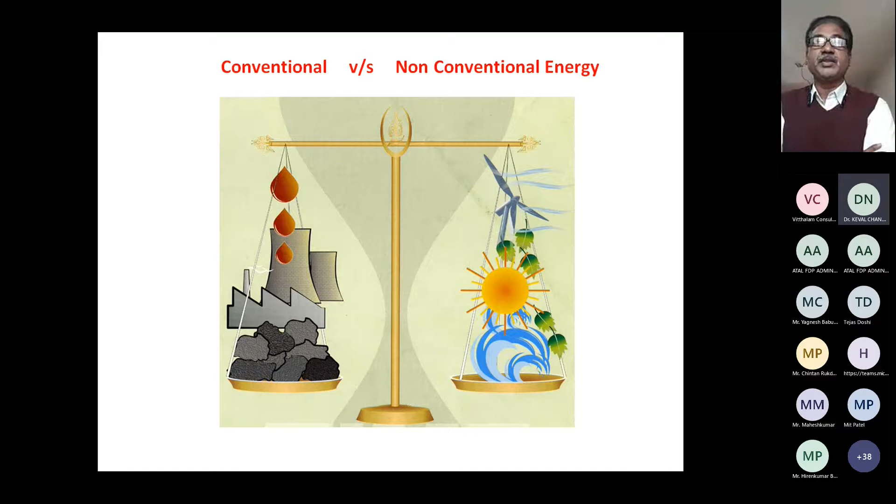So in this sense, we'll be having solar and wind as the renewable energy sources here, and that is the abundant source, the sun, and similarly the hydro, water cycle also there, and windmills. Because of fossil fuel depletion and pollution problems, as all of us know, we are gradually shifting to renewable energy sources, non-conventional energy sources. Solar is the major one, as all of us know, and it is replacing almost the installed capacity, as the government and private sector want to increase.

So people are preferring to go for solar PV. Similarly at the domestic level, all these are, we are all aware that now rooftop solar PV plants are going to reduce or mitigate our problem of electricity generation for the country.

As you know, at present we almost have 350,000 megawatts of installed capacity in India, but it is not sufficient as the GDP growth rate is at 7%. So we have to increase it very much, and one of the helping hands now we have got is solar PV.

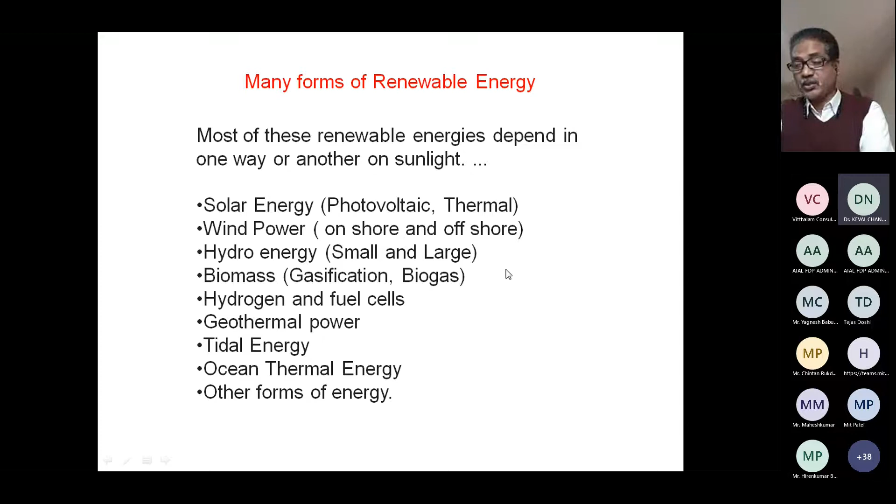So these are all small portions of these energies also getting tapped, but there is not much noticeable thing happening there, and solar and wind are in a big way. It is going on - onshore is there up to now, and offshore also people are exploring at present.

If you see the figures of India's installed capacity, it's mostly coal-based, almost 57 to 60%. At this point in time, that growth is slowly reducing and stabilizing because renewables are picking up a little, and the government has also given emphasis to this.

The installed capacity needs to increase from the current level of 344 gigawatts, that is 3,44,000 megawatts, to 562 gigawatts. It is required to go up as the country is growing, since consuming more energy per capita is an indication of becoming a developed country.

So per capita energy consumption in India means per person per year, how many units of electricity-equivalent energy they are consuming, whether it's petrol, diesel, electricity, or anything else, if you consider all the total energy. So what is the quantum of units you're consuming? That depends, and from that you can tell the country's growth rate.

Typically, per capita energy consumption in India will be like 1,500 to 2,000, whereas in the US and other developed countries these values will be like 15,000 to 20,000. One reason is that in cold countries electricity consumption is very high partly because of weather conditions, as they always run heaters in their homes. That may be there, but even with a lot of industrialization, electricity consumption is much higher. Also, the population is very small there compared to India, so when you calculate per capita, these values become bigger.

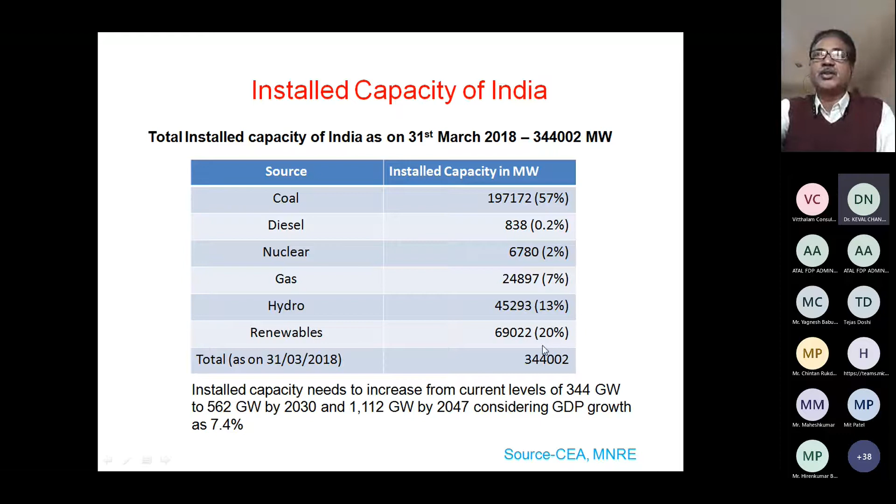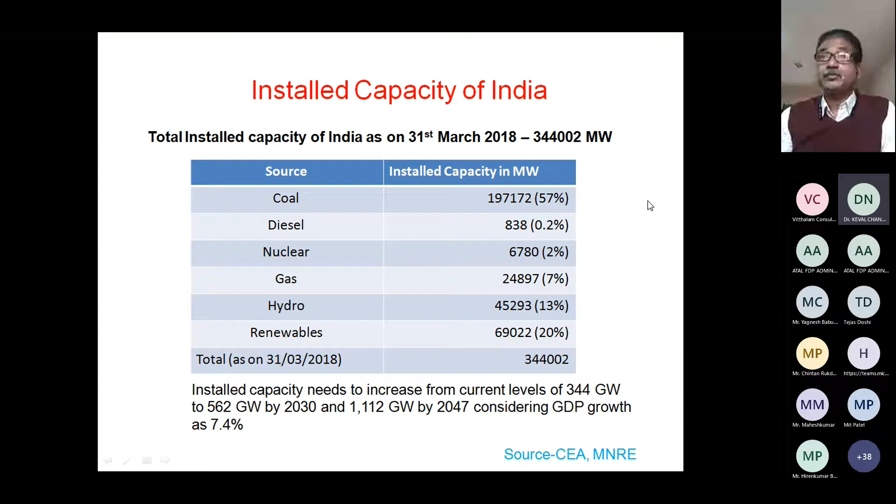The authority is quoting these things. That's why, to reach those values and targets posed by the electricity authority, the government has given a target.

This is another scenario, which is what I showed in the previous slide - renewable energy contributing about 20%. The bifurcation of that is given here: small hydro, wind, and solar. Out of these, wind and solar are the major portions. Earlier in this decade, wind was picking up the maximum potential being tapped, and now solar is picking up because earlier solar costing was more, but now that problem is solved, with a lot of Indian manufacturers available, and also cheaper panels available from China and other sources.

Because of this, more and more solar power plants are being installed. A lot of private parties are also coming up to set up 2,000 or 5,000 megawatt solar power plants, because of the government's Power Purchase Agreement (PPA) facility. Also, the solar power plant gestation period, like installation time, is very small compared to thermal power plants, and it works on a very reliable basis. The only thing is, we can only get this during daytime, and this large energy produced through solar has to be utilized immediately, otherwise we cannot store it. So that is another problem with this.

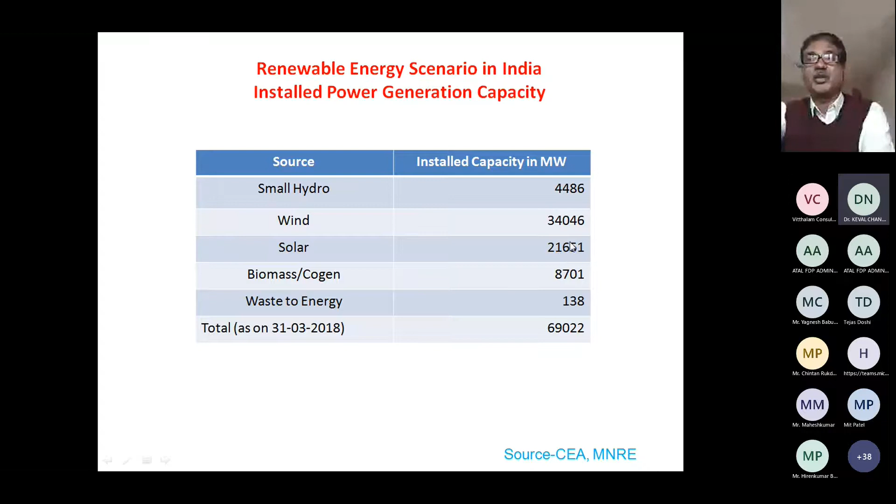And these are the values at present - around 20 gigawatts being produced through solar. These are the figures up to 18.

Because of this, energy consumption is also increasing plan by plan. The distribution can be seen across domestic, agriculture, and industrial sectors. Industrial is the major consumer, followed by agriculture, and then T&D losses. People are working a lot to reduce those losses, which will also be a plus point for everyone. Domestic consumption will also gradually reduce because everybody is now putting up rooftop solar, and LED lamp replacement is also going on, so compared to previous consumption, domestic consumption will gradually reduce.

It may not be reducing, but we are also having alternate ways of meeting that particular demand. So the overall load on the installed capacity of India will be reducing. That burden will be reduced, and whatever is installed capacity will increase, so that you can easily divert it for agriculture and industrial use.

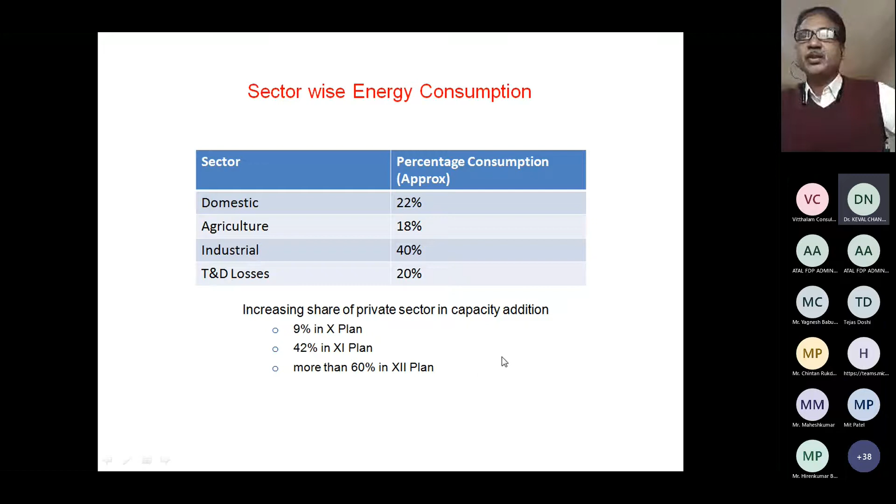These are the major things. Our country's prime focus is agriculture and industrial sectors. So these will be picking up, meaning enough energy supply will be there for these consumers.

Similarly, that's why the push to renewables is given. As I told you, the gestation period advantage is there, so quickly if you want to meet the targets of building up enough installed capacity, renewables help.

That's why the government has given the target of 2022: 100 gigawatt of solar and 60 gigawatt of wind energy. Now solar is around 18, it was around 25 gigawatt, and now we have to shoot up like anything.

Because of this, a lot of private players like Adani, Tata, and others are also setting up power plants, and that will also add to these capacities. Even though we are very far behind this particular target at present...

Because of this announcement, they initiated about 20,000 megawatts in our Gujarat or Kutch area, and some land allocation is also done. The work is going on, and we have to try to achieve this 100 gigawatt.

So what happens is that 344 gigawatts, which is there at present in 2018 figures, if you increase it by 100, that means it will become 450 or so. We'll be nearing the requirement for 2030, which is around 500, 550 or 560 gigawatts. So that we should be able to achieve.

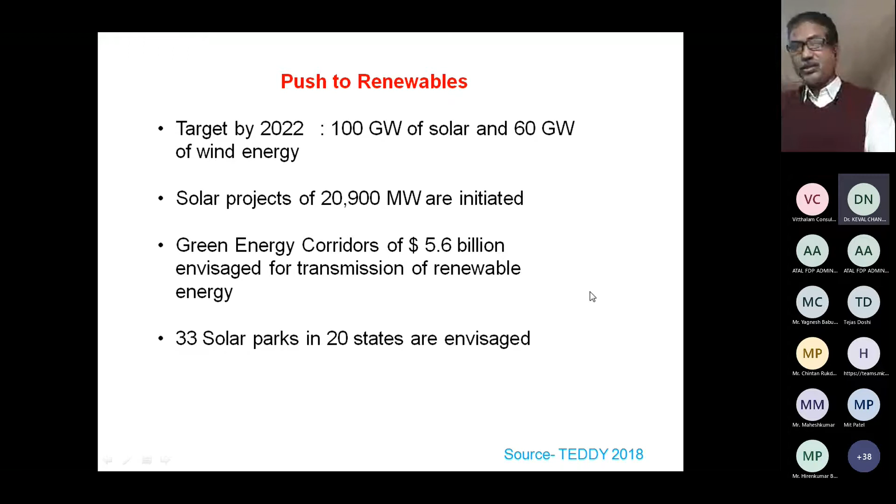Okay, and next one is the green energy corridors. 5.6 billion is there, and similarly 33 solar parks in 20 states are envisaged, and some of them are getting realized. Next, the typical example to observe the growth of renewables is the capacity addition in 2016 and 17.

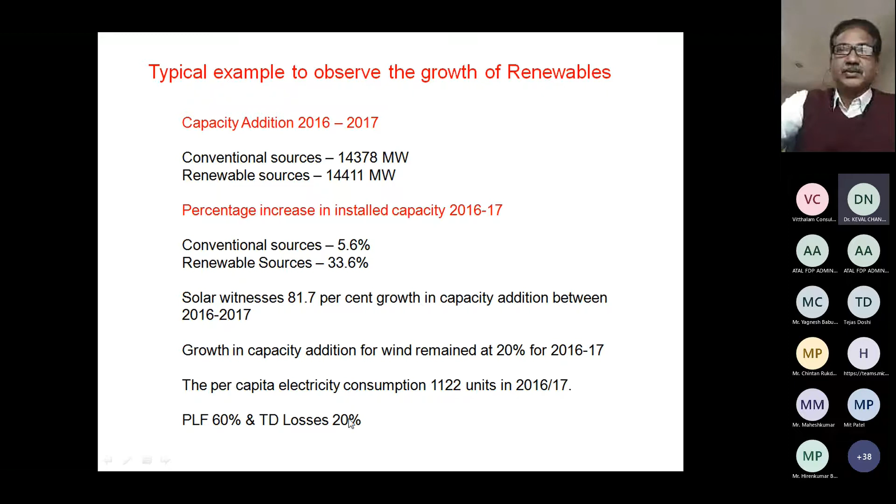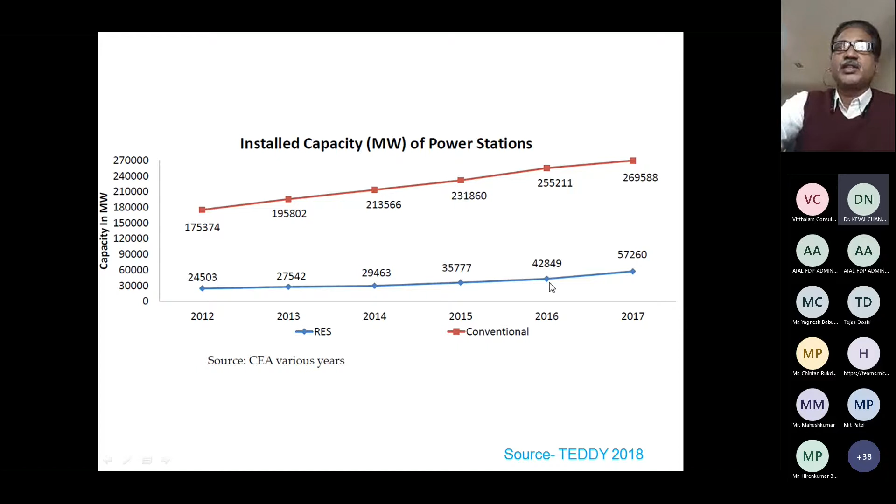Similarly, installed capacity of power stations, RES as well as conventional EPC, are gradually increasing. Towards 18, 19, 20, the renewable curve will be steeper compared to conventional power installation. Source-wise, if you see solar and wind, wind was there in the earlier period, and now solar will steeply increase.

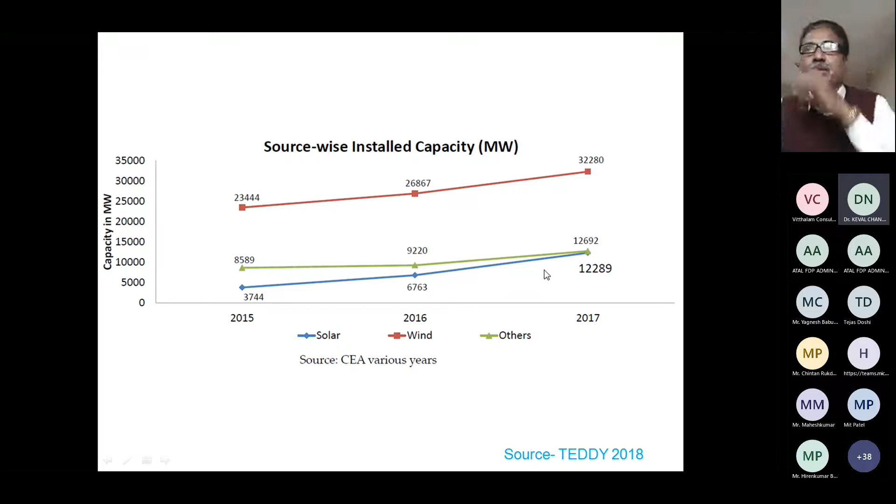So the renewable energy minimum target for the 12th plan is reaching into the 13th plan. As I told you, the gigawatt target was 10 gigawatt earlier, and now it has increased to 100 gigawatt. The government has envisaged the potential of solar power, and easily we can set up these power plants. That's why they fixed the target at 100 gigawatt solar and 60 gigawatt wind energy.

If you see these figures and values, very ambitiously the government has fixed them up. Can we able to reach there? That is also a doubt, but at least 50% of that we are going to meet. That is what the present developments show, with most parties taking interest in these particular installations.

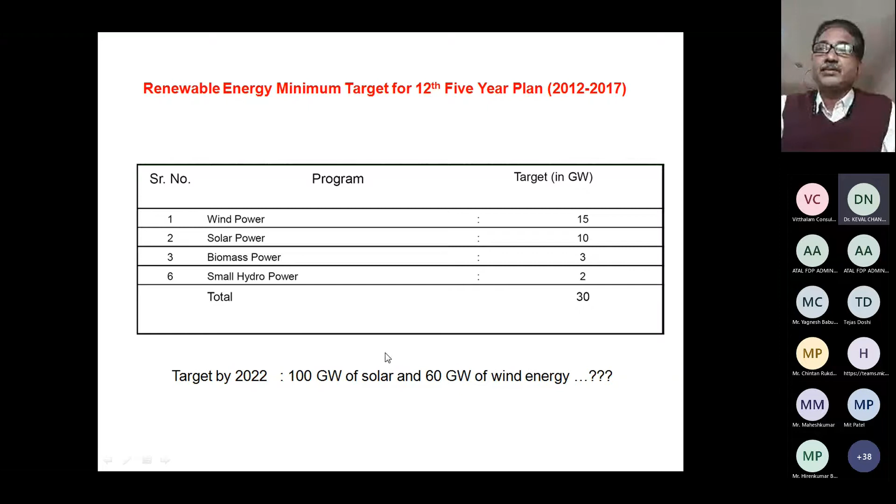Wind is also a potential we have. If you go offshore, you can increase the potential even more. These are all similar things, and very big potentials are there, but lacking technology and determination, we are not exploring these things. Wherever it is very cost effective, people will try to do that.

When there is no other option, you have to try to explore other technologies also. Similarly, the year-wise target for solar energy is given by the MNRE, Ministry of New and Renewable Energy - solar targets for both rooftop and ground-mounted solar plants.

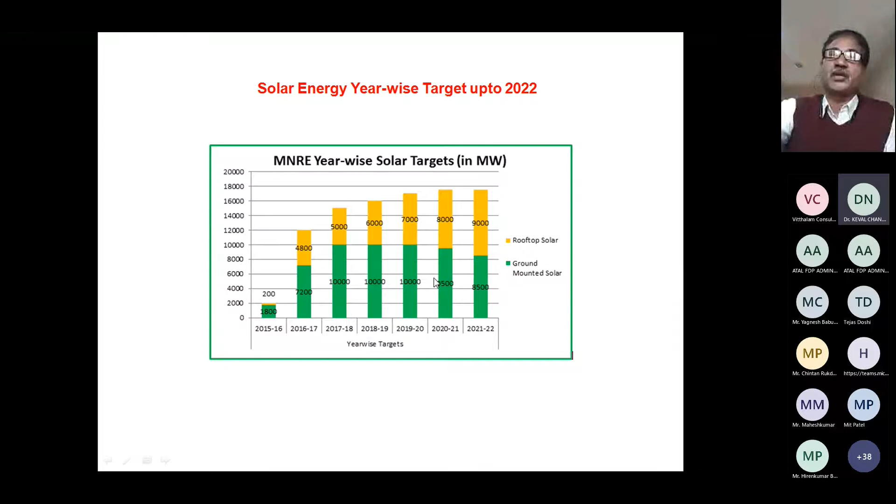So these all add up. Because of these initiatives, the country's renewable energy attractiveness ranking has improved. India also reached 4th or 5th rank in wind energy. This shows the development happening, which is encouraging.

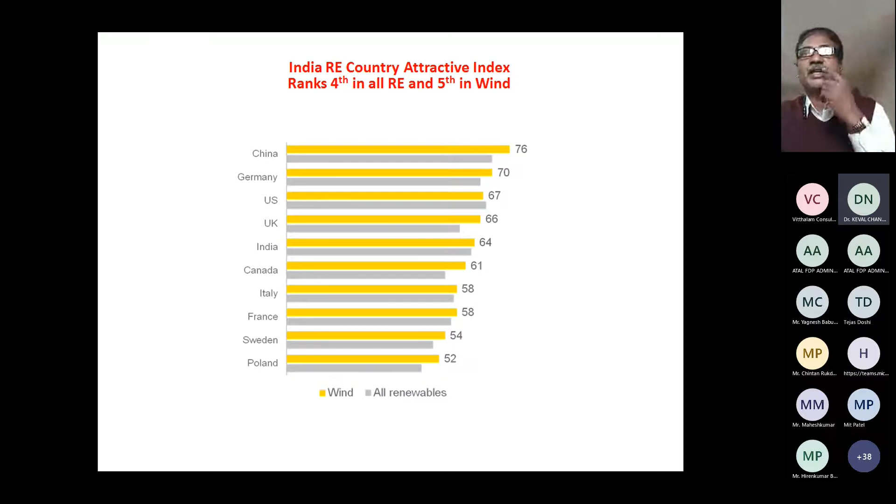Similarly, if you see the levelized cost of energy production - the cost incurred to produce 1 unit of energy - earlier coal was always very low cost, but comparatively now it is going to increase a little bit.

Similarly, wind cost is also nominal, which is why these technologies were very much used. Whereas solar PV has drastically changed its scale, and now it has reduced to almost 2.5 to 3 rupees. But rooftop solar is a little costlier, around 4.5 to 5 rupees.

But for large installations, megawatt-size plants, the production cost comes to almost 2.5 to 3 rupees. So that is now very competitive with conventional electricity production, which is why a lot of emphasis has been given to solar energy.

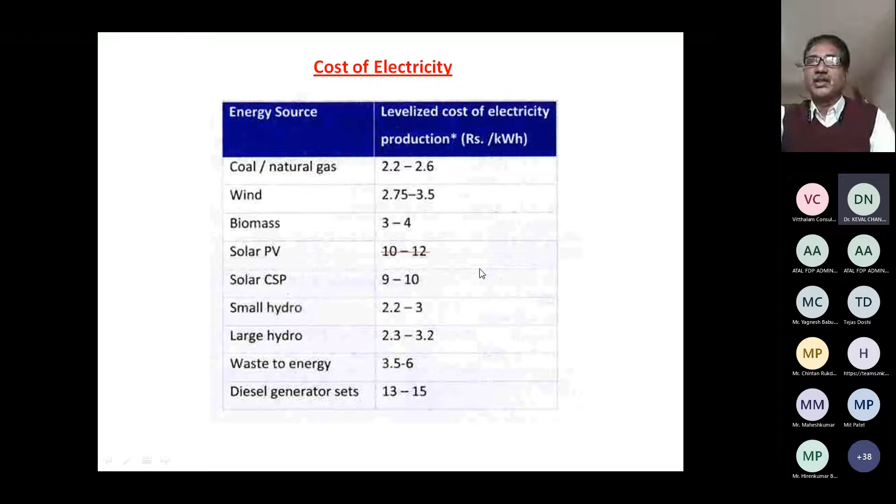Similarly, what is the present scenario we have? If I talk about hybridizing solar and wind, whatever electricity is produced can be stored in terms of hydrogen and used through the fuel cell route.

Will we gain anything from this? Because ultimately we have to look at the thermodynamic and overall efficiency of the system - the electrical efficiency - what we are putting in versus what we get out.

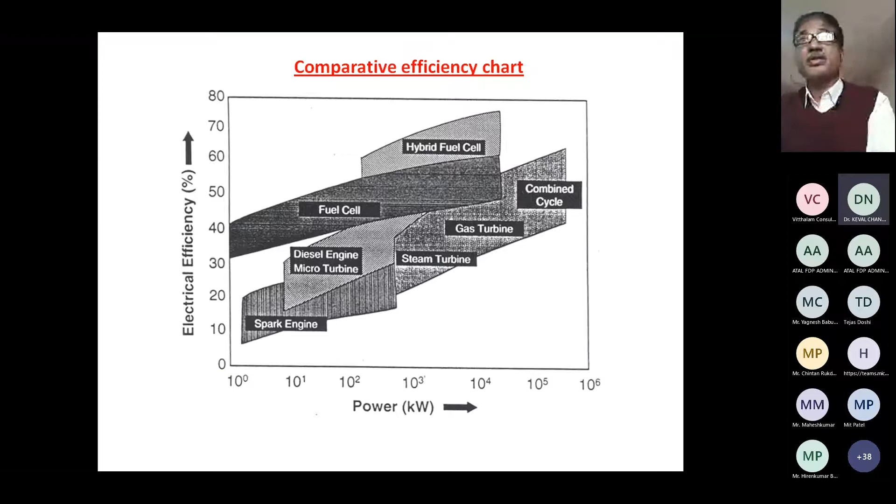Similarly for electrical generation, stationary fuel cell stations, if you keep supplying hydrogen and oxygen, you will continuously get electricity. So that is one of the advantages you have to keep in mind about the fuel cell.

The solar energy potential - all of us know a lot of potential is there, and it will be translated and tapped. Then you will be able to easily reach the 100 gigawatt target fixed by the government, at least by 2024 or 2025. Otherwise, it's not there.

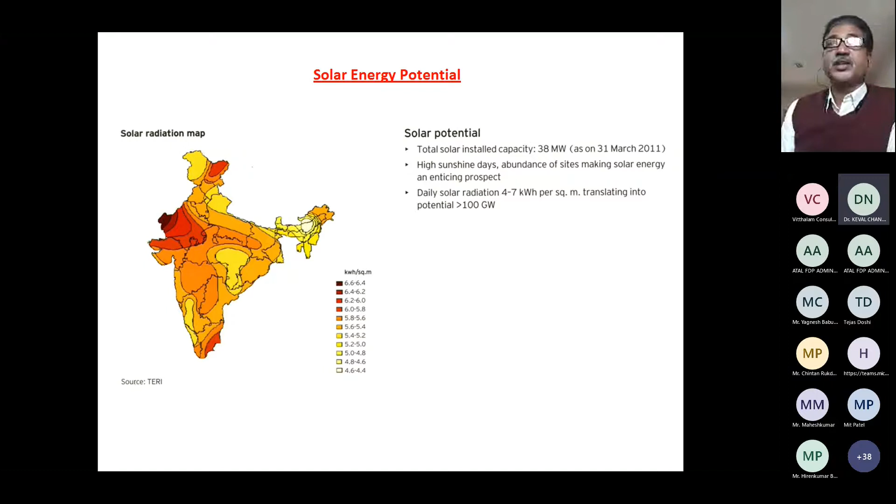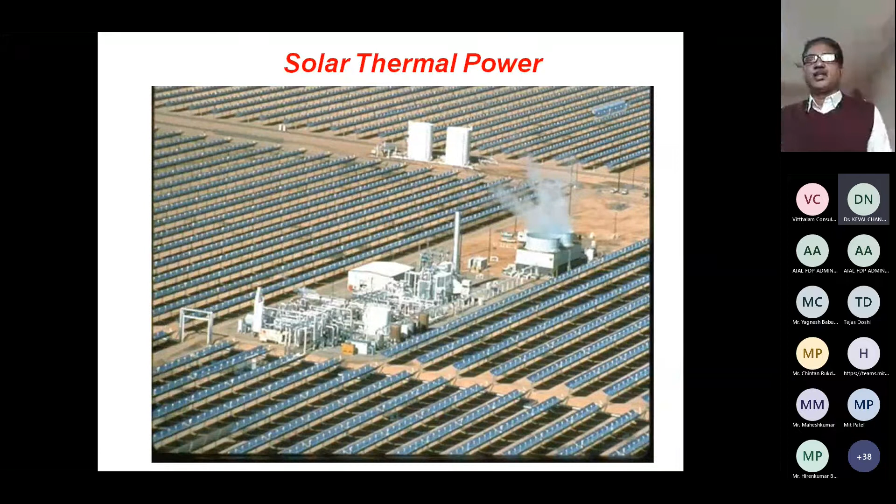So these are the solar thermal power plants. As I told you in the cost comparison, solar thermal power plants will be a little higher in cost, and the technology is also not as established, and ease of maintenance is less compared to solar PV. That's why solar thermal has not picked up so well. But this is also one of the mature technologies we have, because sometimes it is required to be operated.

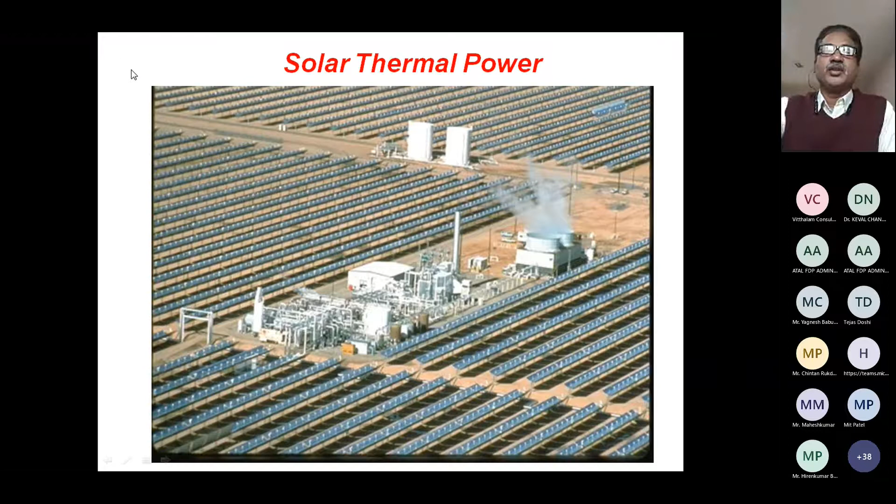Similarly, this is the layout of this particular type of power plant. Solar collectors, trough collectors you can have, and circulate feed water into this, and then it goes into superheaters, vaporizers, and then it works through expansion in the turbine. So this is all a normal Rankine cycle, only the input instead of coal is from solar.

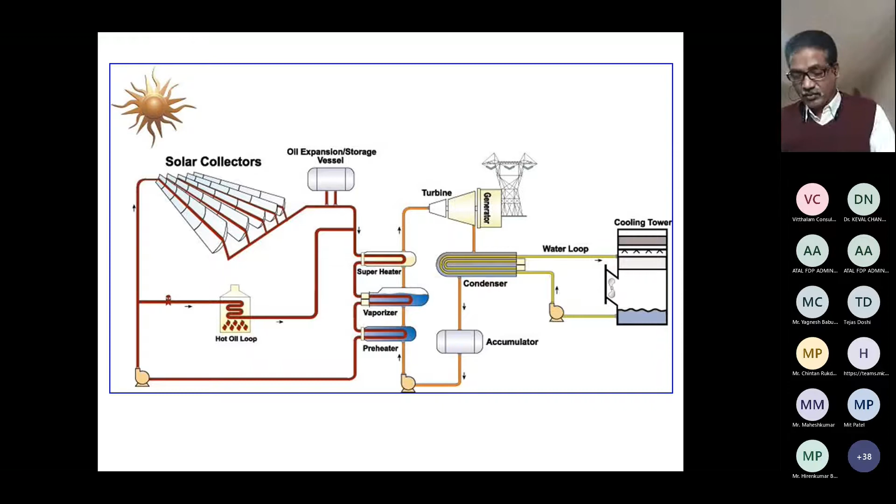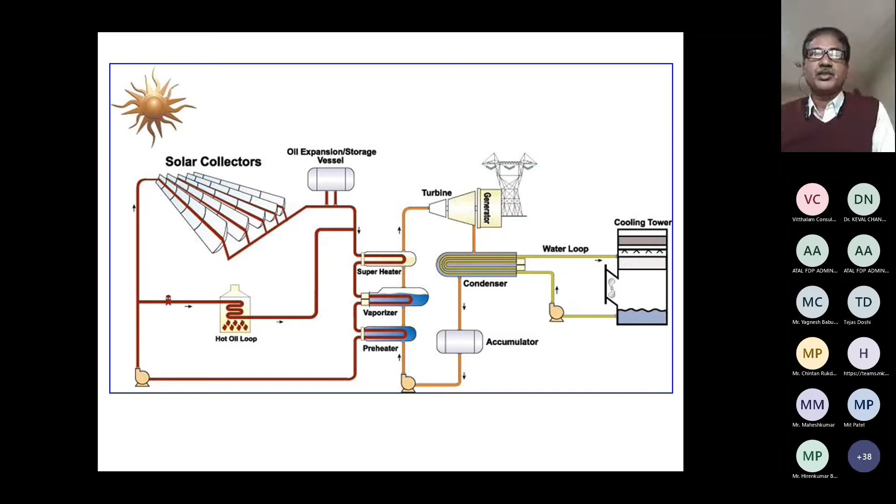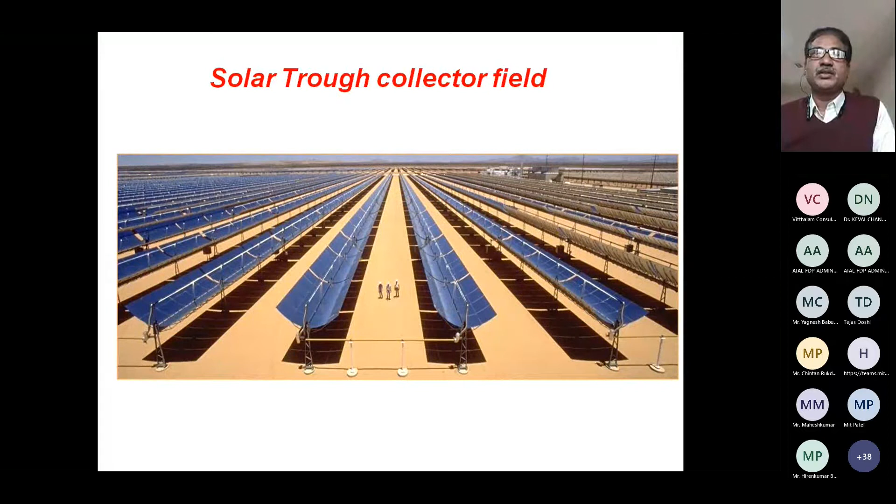But the temperatures we are going to achieve in these things will be less, up to 350 degrees centigrade - that's a very high value if I am quoting. So that much feasibility is there, in that range. These are all solar trough collectors in the field, and people are also working on this in a big way.

You have a huge parabolic trough collector field, and field practices like utility, in the sense feed water heating, etc., are also possible. A lot of people are trying it in existing power plants where feed water heating can be done by solar, so at least up to 10 to 15% of energy can be saved. That much coal can be saved and need not be burned, so that much pollution creation you can stop - carbon credits and all. So that is another way of doing it.

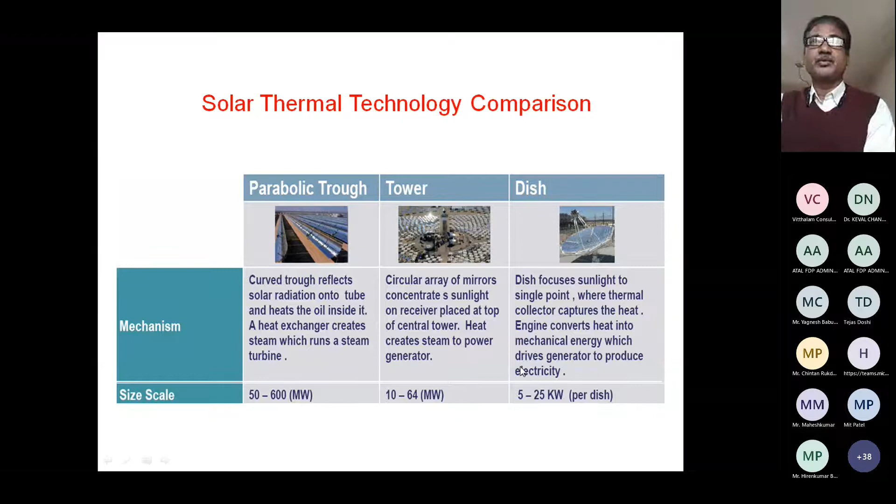And these are the ranges one can think about when going for this type of solar thermal based power plants for electricity generation.

Solar PV farm is almost a mature technology. People are working on it - the only thing is it will go on increasing if you have better solar PV cells. Currently they are at most 15 to 20%, so that is the efficiency you'll be getting. But here the efficiency doesn't matter much because we are not spending anything on running cost or fuel cost. So that's why it is picking up a lot.

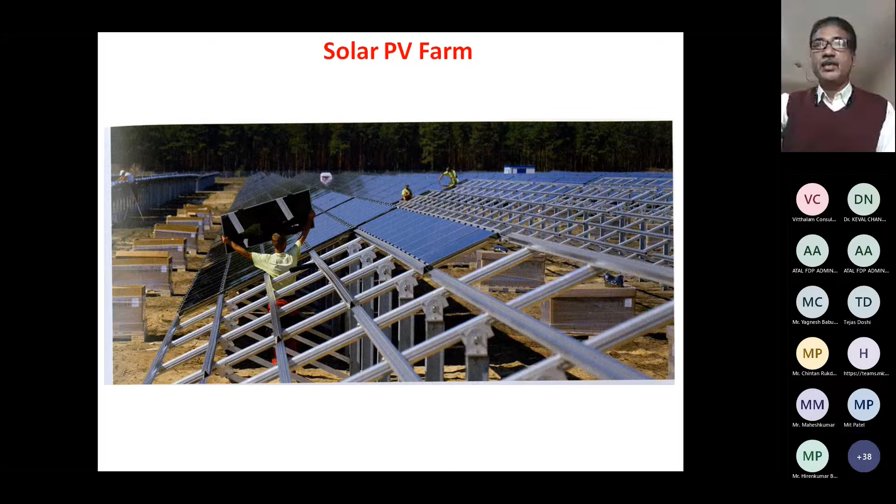So here also, just state-wise, let me mention some values from the data. Gujarat was one of the leading states in installed solar capacity, but now it is still increasing as a front runner. But some states like Rajasthan and Andhra Pradesh are taking the lead, surpassing Gujarat. That is what is happening. But again, because of the recent announcement of the Kutch power plant, etc., Gujarat will again be a front runner as far as solar is concerned.

Are you getting my noise, the voice? Sorry. Yes sir, voice is clear, this is okay.

Okay, so this is about the solar PV we are talking about. Then we also talk about the solar wind farm, and then we will try to club it together and aggregate. What are the other storage methods we will discuss in a few minutes.

And the wind farm also you have seen - a 1 megawatt windmill, a single plant, earlier it was having 250 kilowatt and 500, and later on people are making scaling up to 5 megawatt plants also. But as of now in India, we mostly have 500 kilowatt, half megawatt, and 1 megawatt windmills installed in a lot of places.

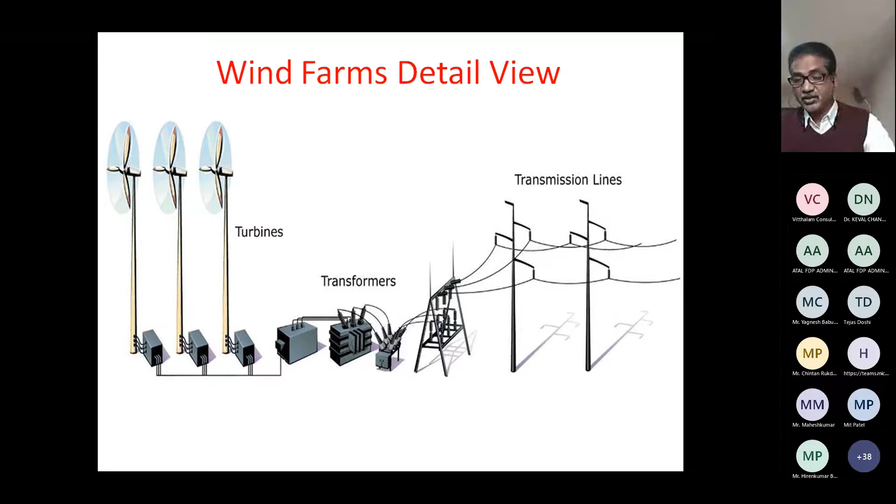So this type of similar view will be seen wherever the wind farm is there - a lot of windmills will be present at particular distances which are maintained, and then the setup for exporting these things to the grid. Here the catch is you don't have any battery storage or something like that, so it will be continuously fed to the grid whenever it is generated.

And there can also be - as I told you, abroad people are trying a lot of offshore wind farms. Here also, it is very expensive from the installation point of view, that's why people have not yet ventured into this.

These things we'll discuss later, including residential wind systems and net metering. Similarly, some of these windmills are modified and designed for low wind speed operations, like terrace installations. If you install these, the blade angle of attack will be different compared to the regular windmills seen in previous pictures.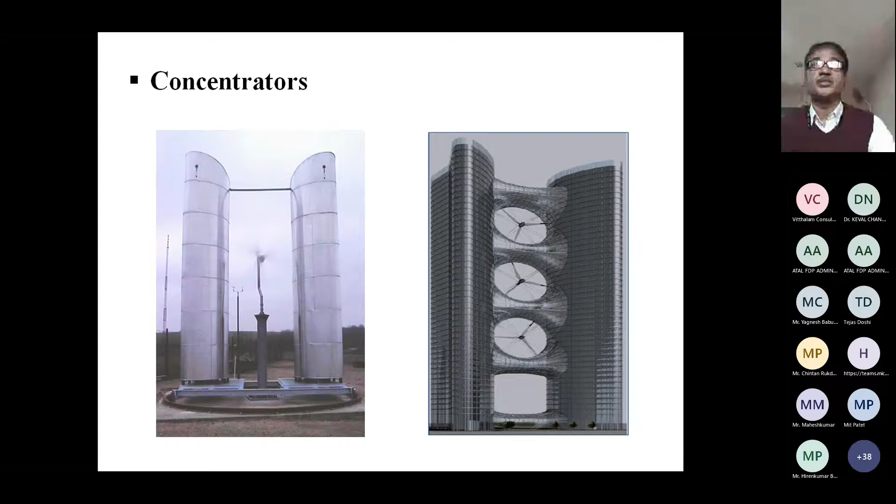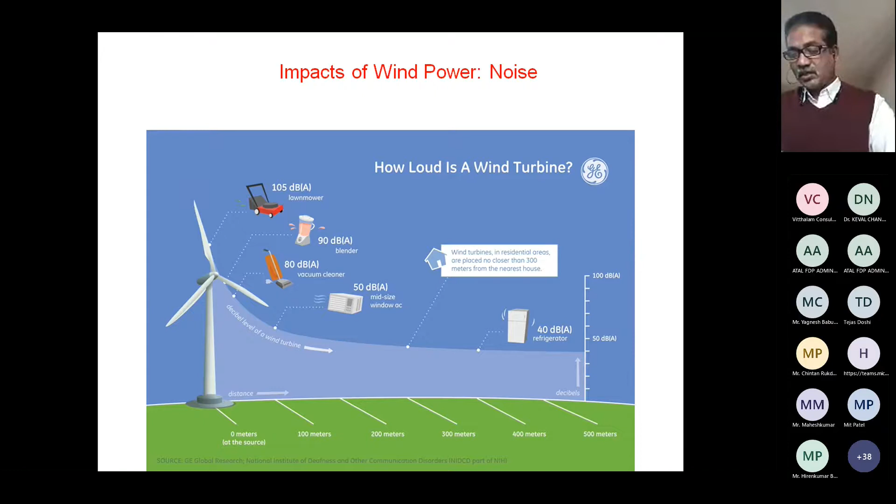Wind turbines in residential areas are placed no closer than 300 meters from the nearest house. If you follow that distance, 300 or even 500 meters, that's okay. That's why the small windmills on the roof that I'm talking about will also not make much noise - these are all megawatt-size commercial windmills we're discussing.

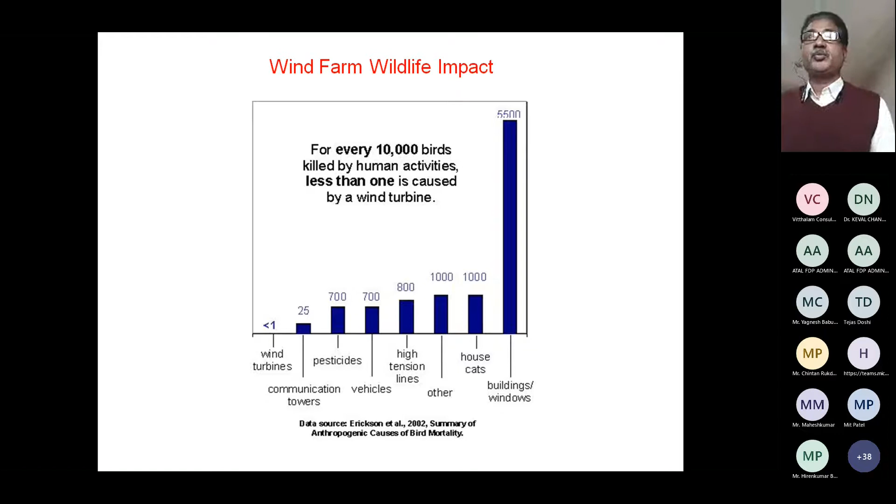Similarly, another problem with wind farms is that wildlife, particularly birds, will be killed. But the data shows that for every 10,000 birds killed by human activities, less than one is caused by a wind turbine. So almost, in 10,000 birds, only one death will be due to a wind turbine. So a wind farm is not a harm to us - it's useful for production of energy and electricity.

The problem is why we have to combine these things: wind energy is available when wind is blowing, and solar energy is available when the sun is shining. These two are somewhat opposite in the sense of day and night occupation. The sun is there in the day, and wind is still there at night too - night can be a little better compared to day, depending upon the location. Because of this, combining these two can provide a bit more continuity and consistency in power generation.

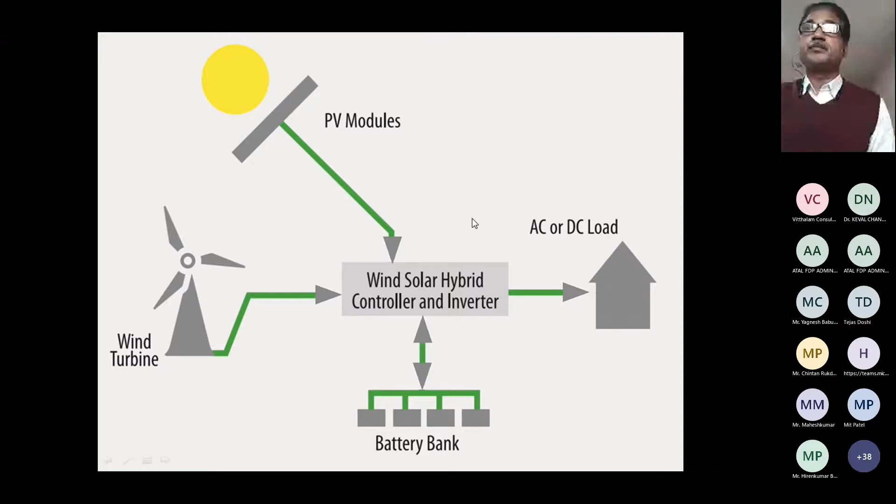Next, also a similar setup in the other way of representation. The data collection also will be there, so that at research level we should be able to have a system which will give you the data of wind generation, what are the times available, solar generation, and what is the quantity.

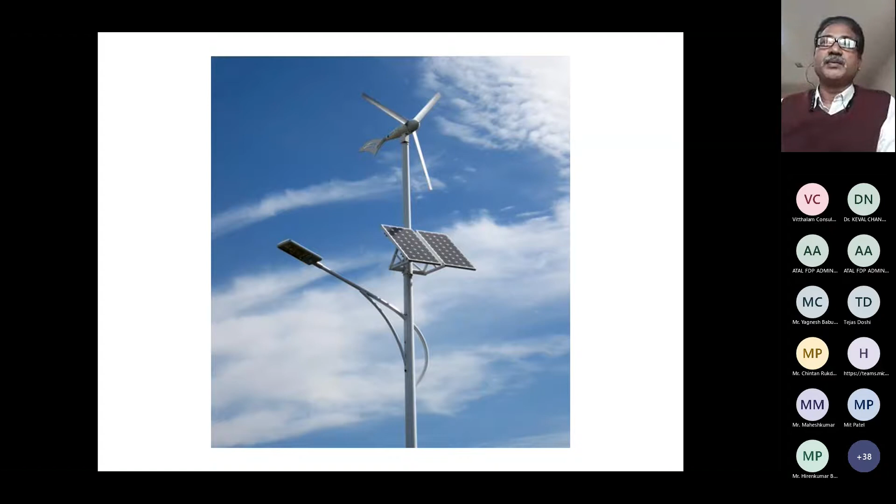Similarly, hybridization of solar and wind is required. For household purposes and small industries also, you can have this type of solar PV and windmill combination.

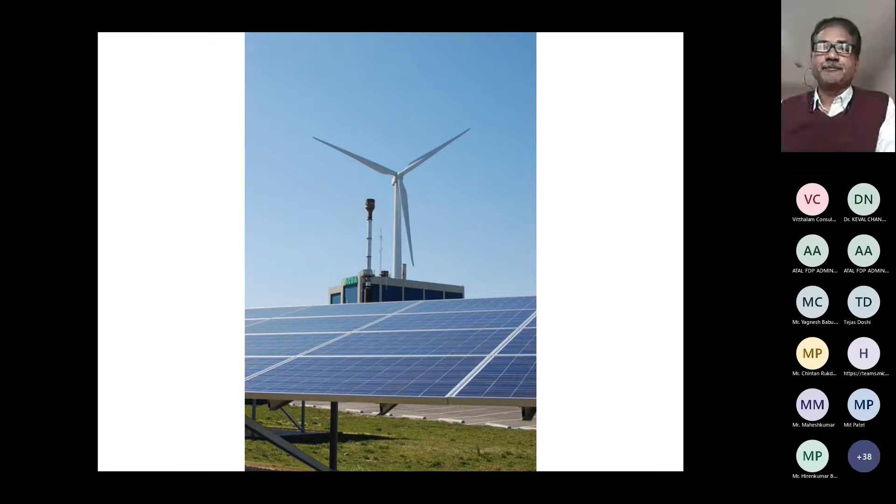Now we'll be talking about solar-based hydrogen generation, which will be given for hydrogen generation, and then through the fuel cell route you can run this particular thing. Here you can have the solar and wind hybridization, and continuously it will be working.

Whatever electricity is generated at daytime, for domestic applications you will be using it to some extent, and the remaining time the electricity will be going to produce more. In the daytime, even if you don't want to use anything, the solar cells will still be producing electricity, so you have to store that energy. Storing requires a big battery bank, and batteries are very maintenance-intensive.

That's why grid feeding happens. But sometimes the grid is also not available, so when the grid is not live, you cannot export the energy you are going to get. At that time also, the solar PV will be producing electricity, and the windmill is also producing electricity. So where does that electricity go? This type of opportunity one has to identify, and we have to think about a system which can generate hydrogen.

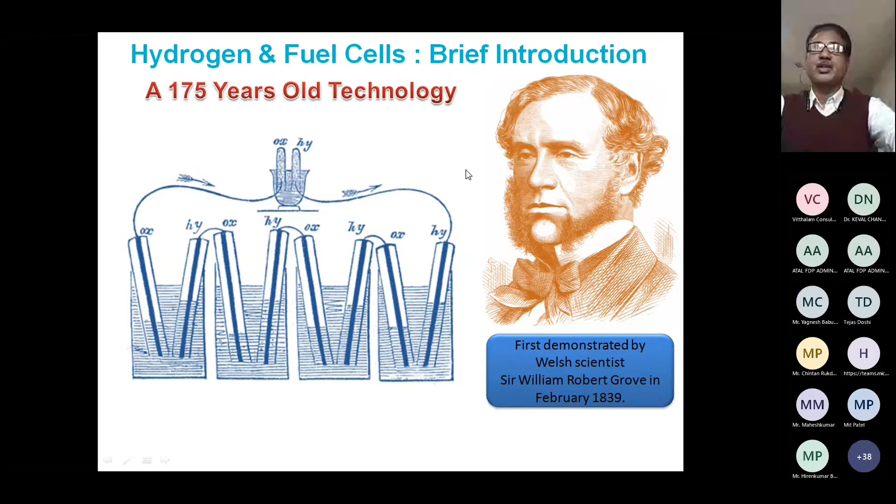And these fuel cells can be very modular. If you want to increase the capacity, you increase the number of stacks in series and parallel, and accordingly you can have the connection.

Similar to solar PV that we have now, it is also a very easy thing to do nowadays. A lot of people are coming up with startups as well as entrepreneurs entering the business of solar rooftop consultancy and rooftop installation, industries and manufacturers. This has given a lot of edge for people to become entrepreneurs in business.

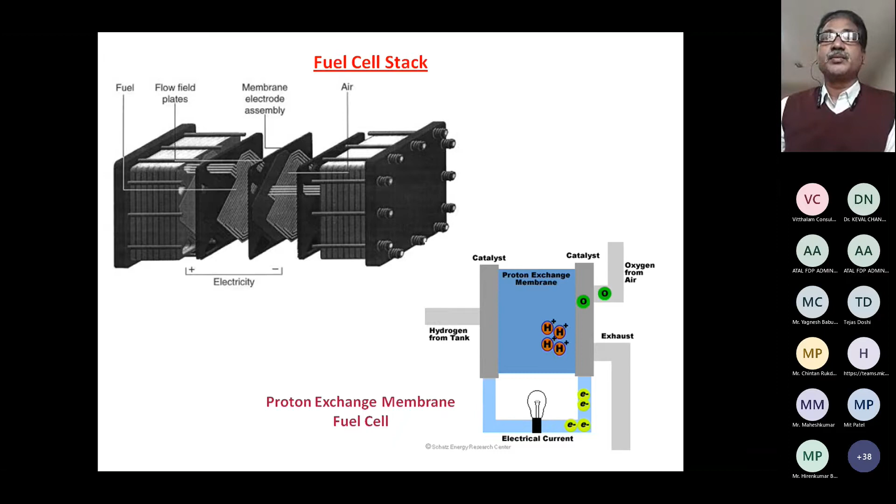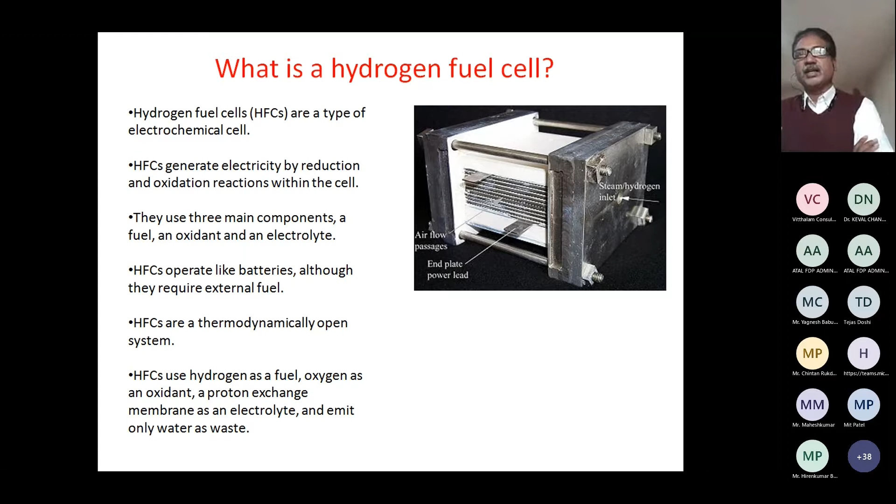And what is a hydrogen fuel cell? Usually, the electricity will be generated. There will be main components, as you have seen already in the picture here. So the fuel, hydrogen, and oxygen is the oxidant, and the proton exchange membrane will act as an electrolyte and emit water as the exhaust.

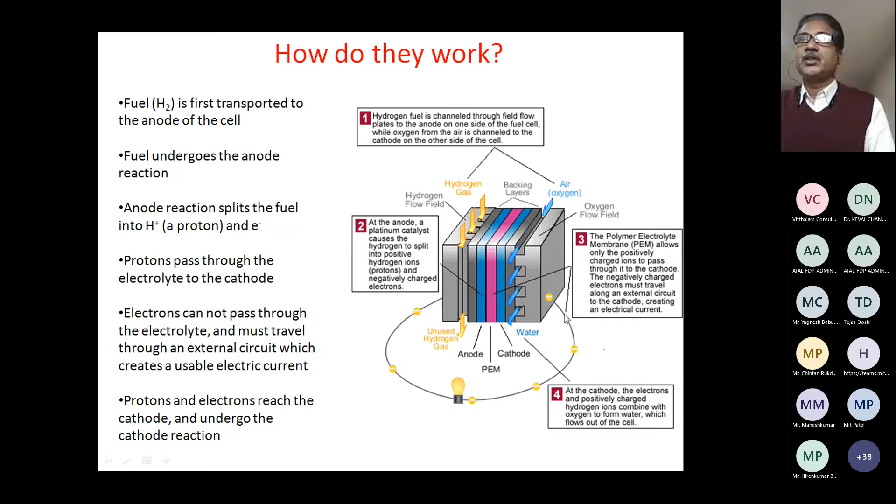So how do they work here? I think all of you are familiar, and from the picture also you got aware of that. The hydrogen gas is entering here and will be going out, and this polymer electrolyte membrane allows only the positively charged ions to pass through it to the cathode, while the negatively charged electrons must travel through the external route, which will be creating an electrical current. So that is a simple understanding about fuel cells.

And there are various types of fuel cells, not just one. The simplest one I have discussed is PEMFC, and then phosphoric acid, alkaline, molten carbonate, and solid oxide fuel cells. All these are there, and the range of temperatures they produce during this particular reaction is also given here. That's why I told you SOFC is one of the highest heat-generating fuel cells, and with that combination you can have a combined cycle with a gas turbine. So those things are possible.

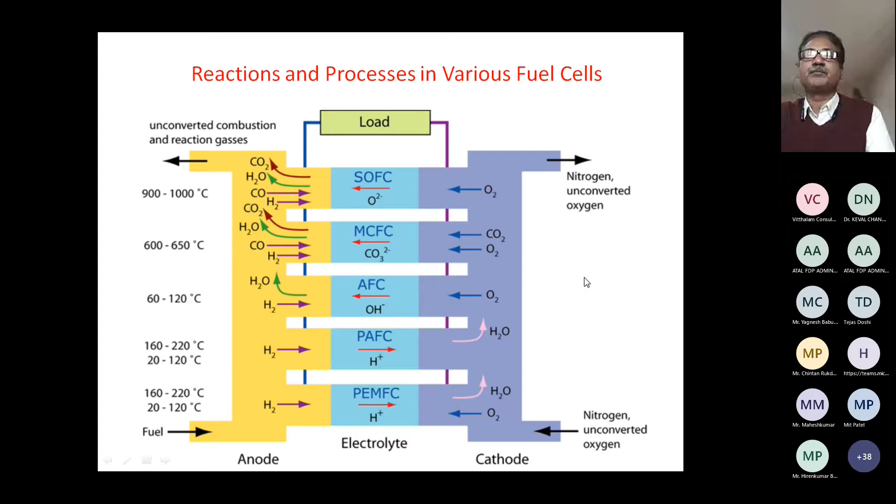PEMFC is the very simplest one, and that's why it is the preferred one for automobiles, etc.

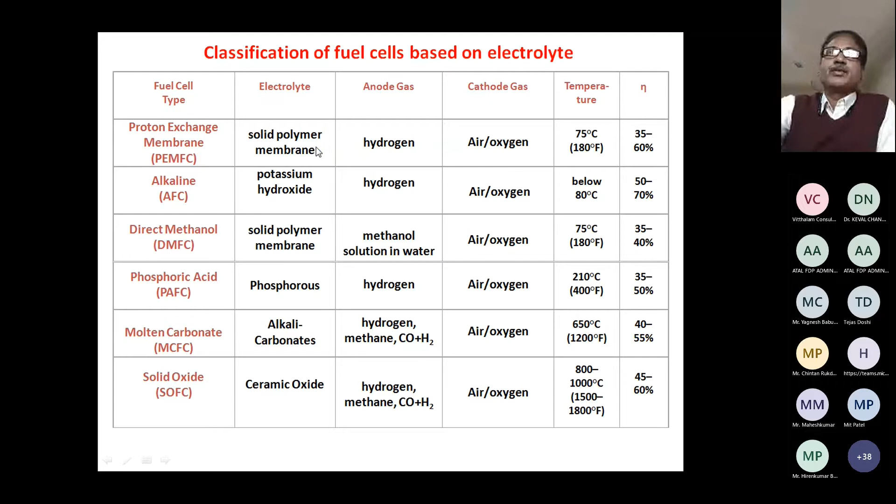So these are just to give the information on efficiency ranges, which go up to 50 to 70, and also like 35 to 60%. And air can also be supplied, as well as oxygen. So these give the general idea about the efficiency and uses of hydrogen fuel cells.

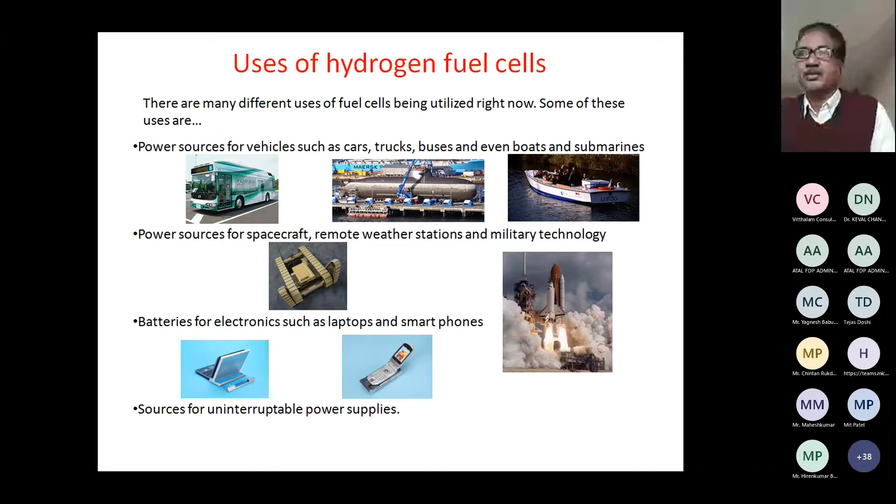As I told you, buses and trucks, vehicles, two-wheelers, and already in rockets, and a lot of other places like marine and remote areas, military technologies, etc., where we will have this particular fuel cell technology with a small hydrogen cylinder and then the fuel cell which we provide. So anywhere we can produce electricity.

So the advantage is high electrical efficiency that is not limited by Carnot efficiency, and no harmful emissions like NOx, SOx, particulates. As I told you, only water vapor comes out, and it can operate with a wide range of fuels, from pure hydrogen to coal gas with suitable reforming. Very quiet operation, no noise, no moving parts, less maintenance, and more reliability.

And potential for cogeneration and hybrid power generation with high energy utilization efficiency, and modular construction that gives a lot of ease in expansion of these plants. It's a 3-in-1 device: energy efficient, environment friendly, and fuel flexible.

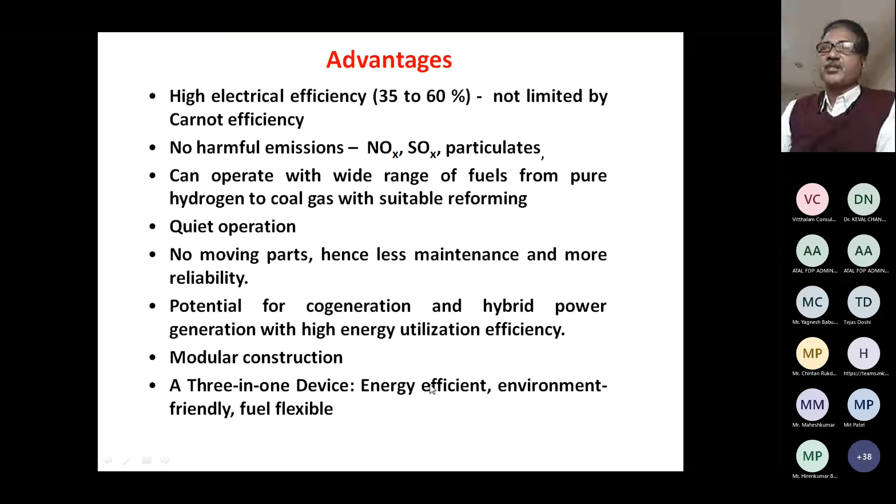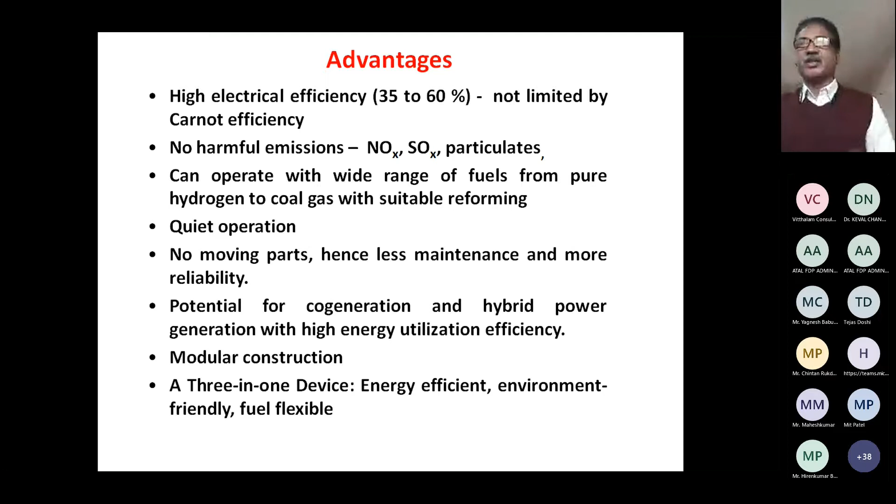Fuel flexible, why they say this is, as shown in different types of cells, some of these fuel cells can be fed other combustible gases with more content of hydrogen in them, and it will take it. The only compromise is a little bit in efficiency, and the way it reacts inside, because of that there will be heat development.

And problems regarding hydrogen fuel cells: lack of hydrogen infrastructure. At present, that is one of the major problems.

Infrastructure for production of hydrogen as well as storage of hydrogen. We all feel now that hydrogen is very dangerous if it gets exploded or something like that. So a lot of safety norms we have to follow, and we have to create better systems for storing it. So that is lacking. There is a need for refueling stations.

EV electric recharge stations are coming up in a big way in India. Similarly, later on, after 10 years or so, we will again try having hydrogen filling stations. That is the future. At present in India, we have only one hydrogen filling station, in Faridabad, Indian Oil Corporation. So that hydrogen filling station is there, and similar stations have to spread over the country. And when these vehicles come up, Hyundai is going to come up with a fuel cell car in the Indian market.

Cost of hydrogen fuel cells, earlier it was high and gradually it is reducing. And carbon cost of production of hydrogen. Problems with hydrogen fuel cell cars include shortage of range, about 260 miles, but people are now telling about almost 350, 400 miles. They are slowly, gradually increasing these capacities.

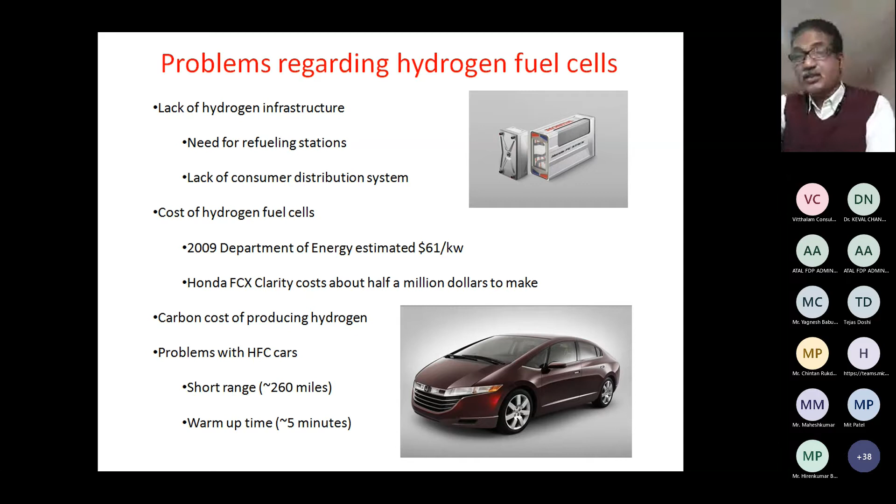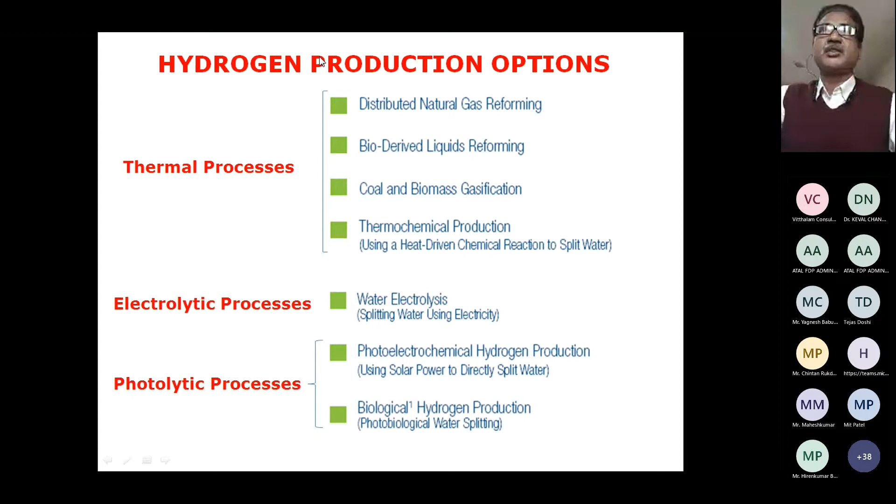One method I already told you is hybridizing solar and wind, so you continuously get electricity and use it in electrolysis, the excess power which you cannot store or feed to the grid. That simple process is electrolysis, water electrolysis, splitting water using electricity. That is one method, but we cannot completely rely on this. At the same time, we have to think about various other production options. There are several processes like thermal, electrolytic, and photolytic processes, and among these we will also try to discuss thermal related methods.

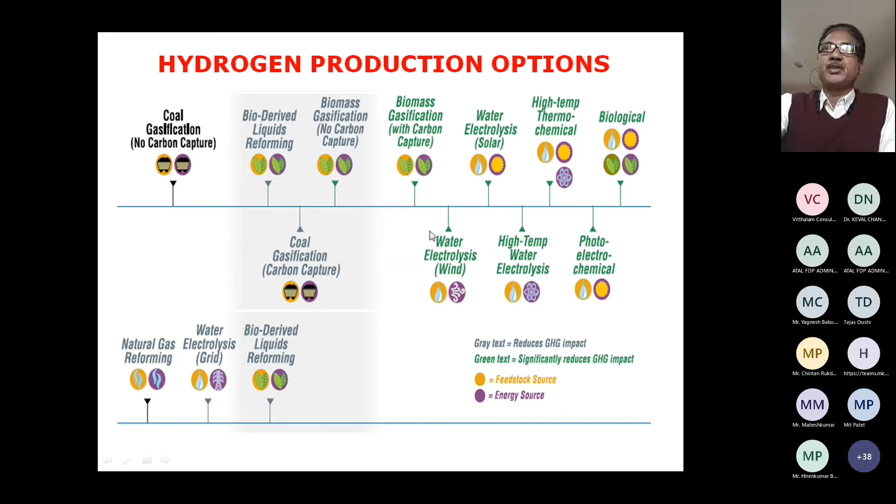So the hydrogen production options, we have several: coal gasification, no carbon capture, liquid reforming, biogasification from biomass, water electrolysis, and the solar route. I am clubbing this water electrolysis with wind also, so wherever the plants are separate, solar and wind, in both places we can have water electrolysis.

And high temperature water electrolysis. In short, for hydrogen filling stations, behind that you may have solar PV parks or something like that, and you continuously get electricity in the daytime, and during that time it converts that into hydrogen, storing it, so that the whole day hydrogen cylinders are available. You can recharge and refuel these vehicles. These cylinders can also be supplied to domestic applications, homes, wherever they have fuel cell packs, similar to how LPG cylinders are used for cooking applications. People can do this in a similar way. But these things are all going to happen maybe by 2050.

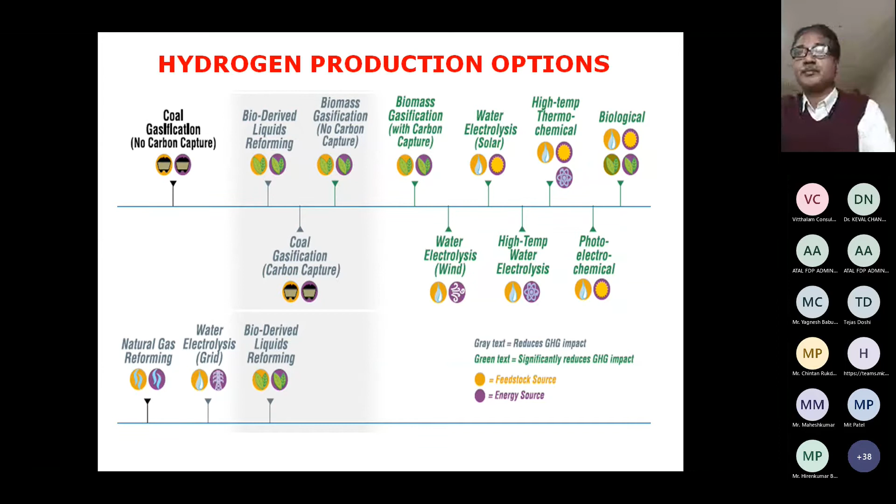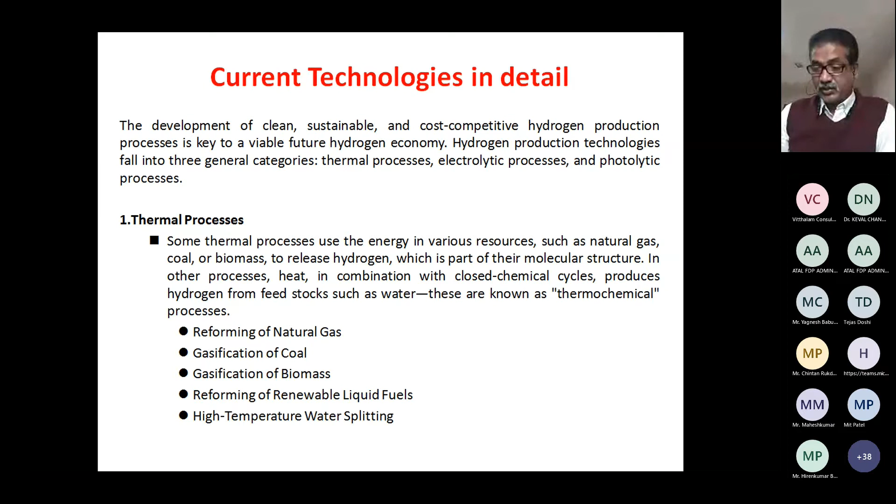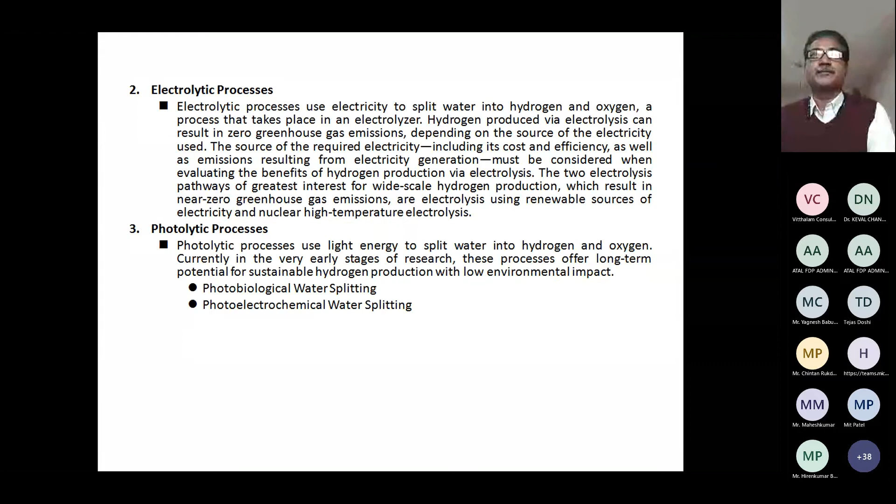So looking at the current technologies in detail, among the thermal processes, one of the easiest things I can explain is solar thermal. We have already seen the type of collectors and concentrators earlier; by using those, can we produce hydrogen? Similarly there are electrolytic processes. So hydrogen production methods: one method we are going to see is the thermal route, the solar thermal route, which is the solar zinc production.

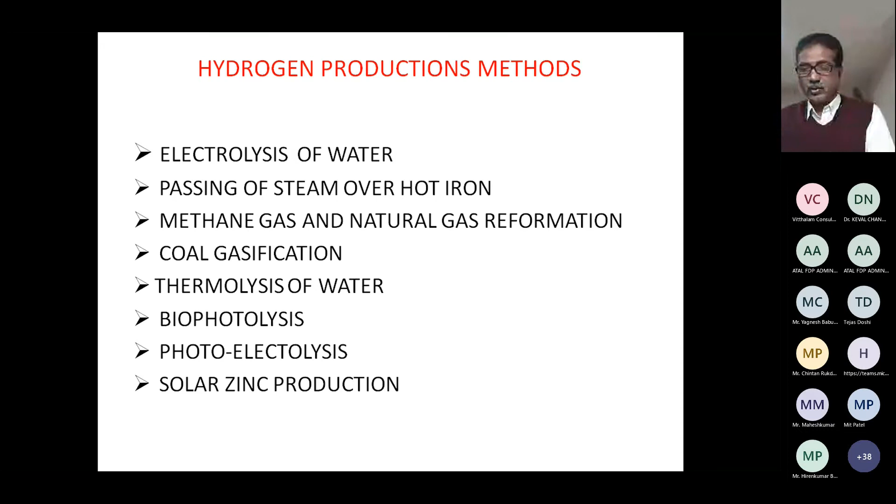The electrolysis of water needs no further explanation; it's a normal, simple process of supplying electricity. And CNG and other gases, like biogas which is rich in methane, if you do reformation on these gases you get hydrogen, but those processes involve more chemical aspects. People are working on these things also. Whichever comes out to be the most meritorious candidate, producing hydrogen at less cost, will be the process that gets established and rules the market.

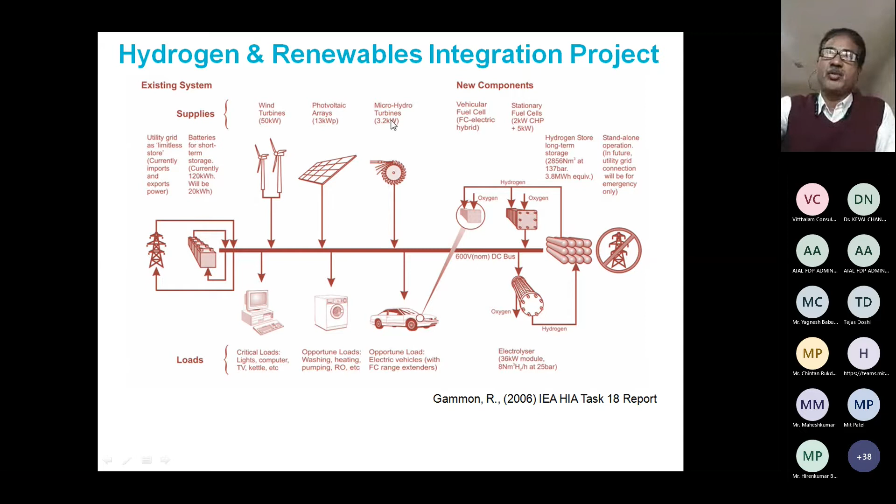As I told you, the integration of renewables for hydrogen production, like windmills and solar, etc., and similarly micro hydro turbines, for small water streams, where you can tap this using a pelton wheel or any other simple turbine. So these things can be clubbed together and used for hydrogen production. That hydrogen can be given to storage, and standalone operations are also possible because of this.

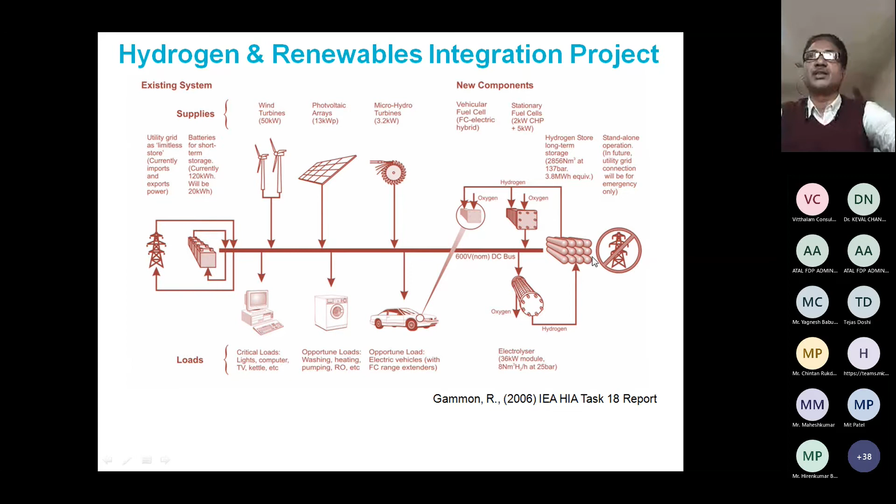On one side the electrolysis process will be going on, and on the other side the fuel cell will be supplied with hydrogen and oxygen, and cars can be run, the washing machine can be run, the system can be run like this. So these are the things we can achieve by integrating.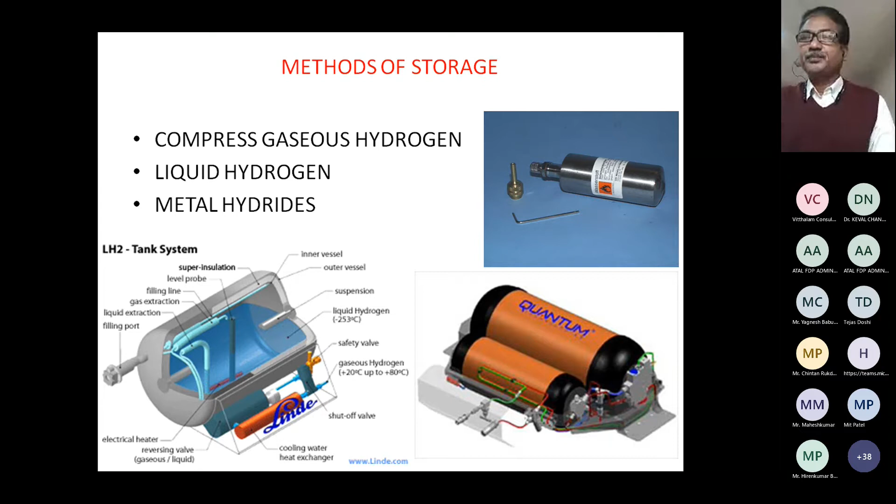To give some idea about storage also, as I told you, you can compress hydrogen and put it in cylinders. Similarly, you can liquefy it and store it as liquid hydrogen. And similarly, metal hydrides, a porous material matrix, kept inside, and when you pass hydrogen to it, it has an absorbing capacity and retains the hydrogen in the matrix pores, which is released as and when required. That type of storage is also possible through metal hydride systems.

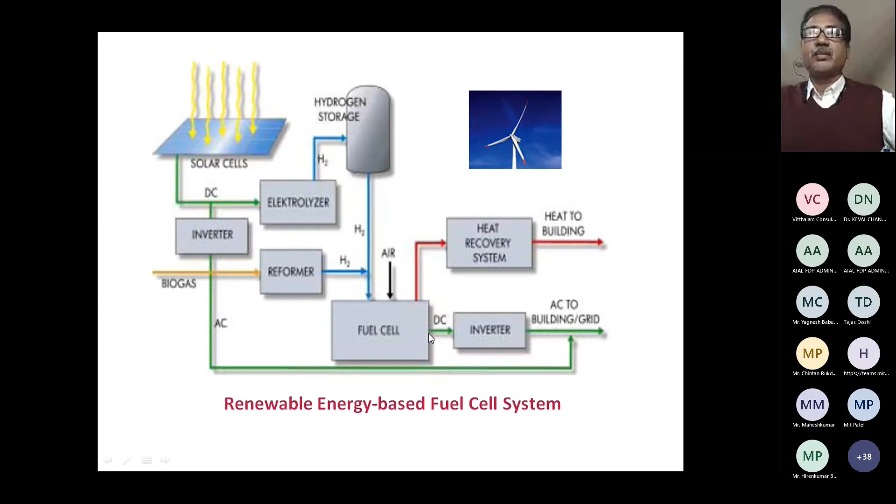And this is what we have seen earlier also. So you can go for the combined cycle, and this is what we are talking about. Initially that diagram has shown you, but it is supposed to be hydrogen based, so that's why it is appropriate to put it here. So once again I'm just displaying it. I hope you understand the whole idea.

The other way of doing hydrogen production is the solar zinc method, the thermochemical production, because it is purely dependent on solar energy. So that's why it is a good thing for Indian conditions, one can apply it. The only thing is the production of hydrogen is a little smaller in quantity. That's why people don't look at it as an economical option, and that's why it's not picked up much. But this is one of the processes, so one should know about it.

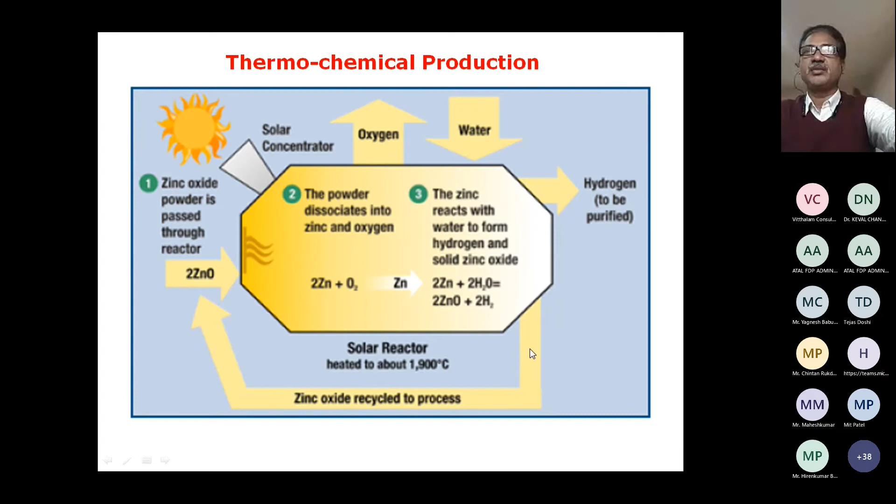So it is a recyclable process. Once it becomes ZnO, it has to be recycled and go to a high temperature source where the highly solar concentrator can produce the high temperature. Then the dissociation and separation process takes place again. So this will go on like a continuous cycle. There will be some attrition during this recycling process, so some makeup zinc oxide or zinc may be required for the design system. But otherwise it is more or less simply a recyclable process that can continuously produce hydrogen.

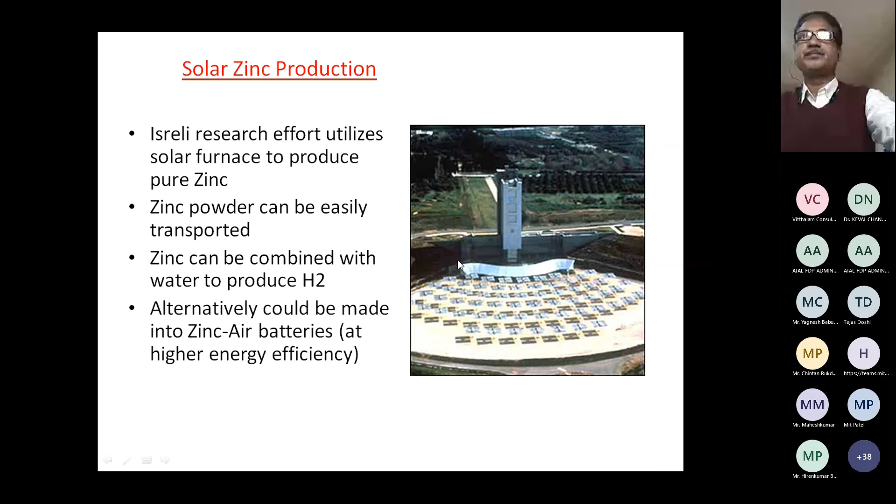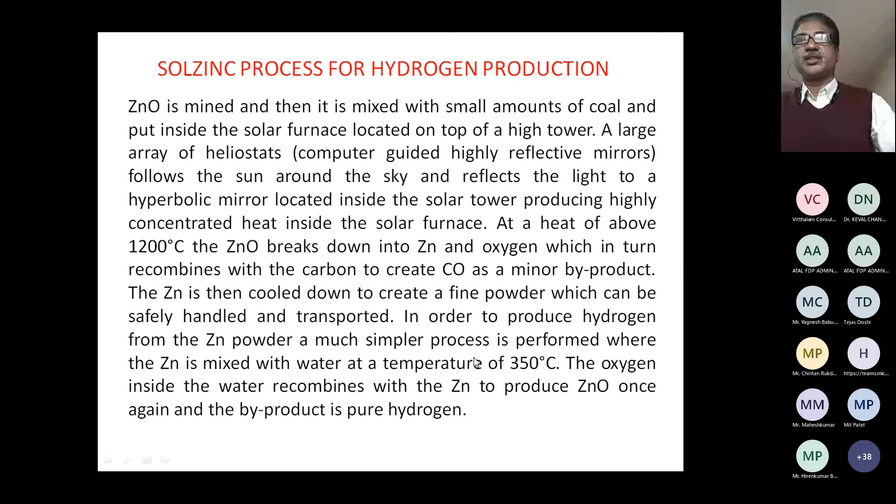This is what I told you - to achieve these types of temperatures, you can use a heliostat and tower mechanism with a reflection system, concentrating all these things to get high temperatures, which will work for making this particular dissociation process of ZnO. And this is what I have explained here - even at 1200 degrees centigrade and more, if you have less efficiency, the ZnO breaks into Zn and oxygen in the process. Also, at 350 degrees and so on, you have the second stage where the production of hydrogen is going to happen.

So this is the process I explained about, and closed chemical cycle uses solar energy to make hydrogen. So this is also a feasible one. Solar energy can be concentrated by mirrors and special lenses to generate temperatures close to 2000, which is what the requirement is.

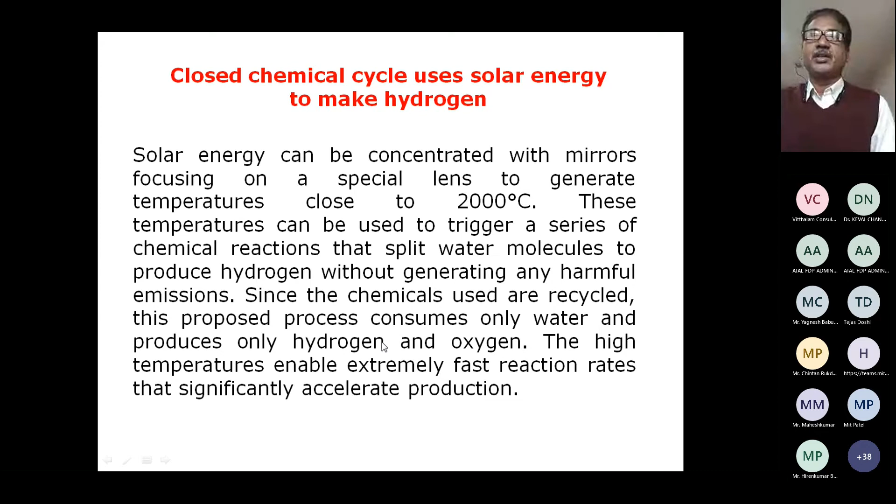This temperature can be used to trigger a series of chemical reactions, split water molecules to produce hydrogen without generating any harmful emissions. So that's also another way of producing hydrogen. There are a lot of R&D challenges since various methods of producing hydrogen are available, and out of that, everybody has to work on so many things, and so many groups are working on it.

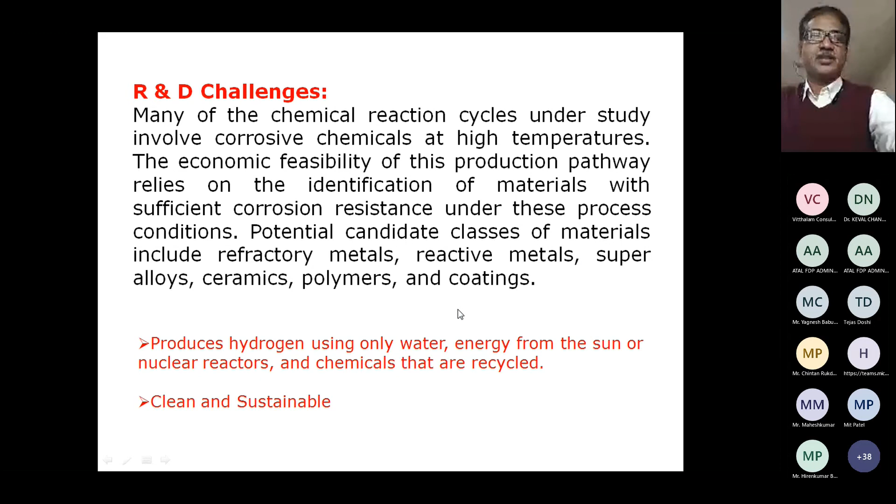Finally, the process which is more economical, more safe, and more easily practicable, that can be adopted. So till then, people have to go on working with these technologies and try to produce hydrogen efficiently, because hydrogen is going to be the future fuel, the future energy. It is also a very clean and sustainable way. If the methods are established, it will become sustainable, because water is the source where you are splitting it and getting hydrogen out of it.

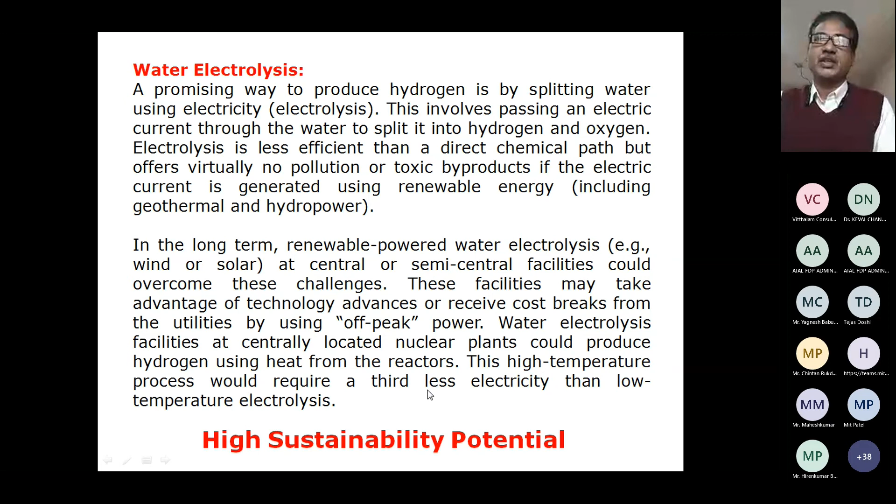These facilities may take advantage of technology advances or receive cost breaks from the utility by using off-peak power. Nowadays there is a lot of grid feeding because of solar and wind, so you have to match the peak loads. During off-peak loads, wind and solar will still be producing electricity, so where will it go? You have to identify this and use it for electrolysis centrally, and then store it.

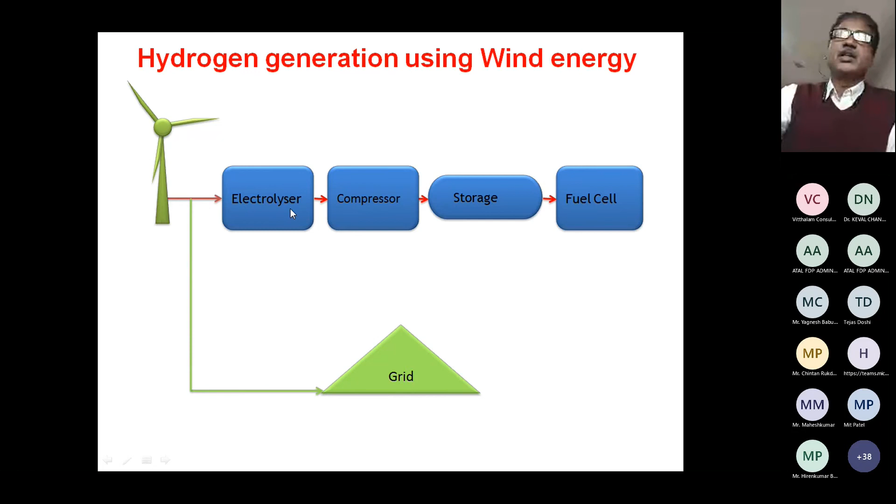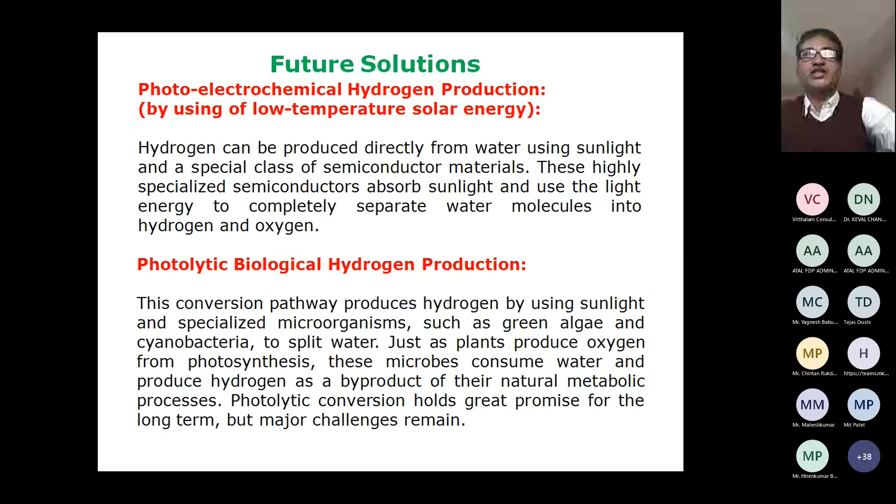So this is what happens with windmill electricity: if you are not feeding it to the grid, then you do electrolysis, compress it, so you can use it later through the fuel cell route. There are other methods also, not much explored. Even microbiological methods, some bacteria and microorganisms, also green algae, are being worked on for producing hydrogen, but these processes have to be established and are still at a very low phase, and hydrogen production itself is also at a very low level.

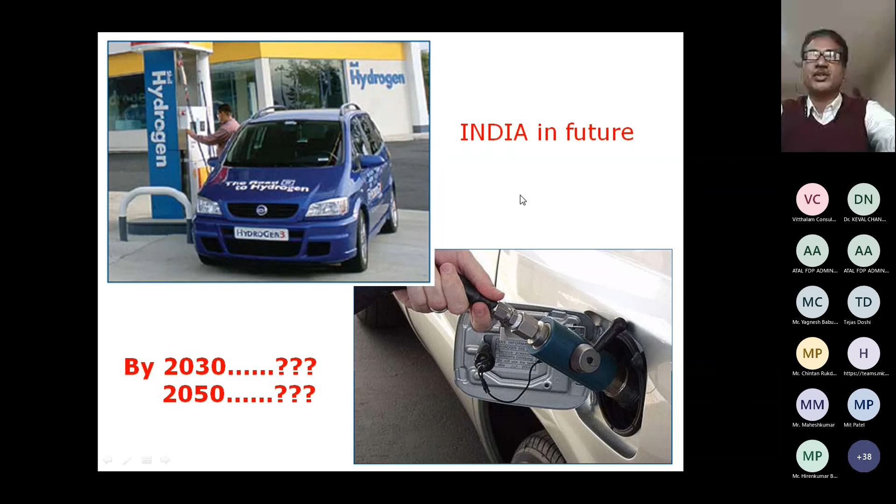So these are the future expectations, and Hyundai is also front-running with fuel cell mobility vehicles. Abroad, they have already launched and a lot of trials have been done. In future, in India also, we'll be having refueling stations by around 2050. Shortly, we'll be looking at charging stations at each of the petrol pumps present now, similarly there will be charging stations, and hydrogen stations will also come up.

So this is what hybriding and facilitating the production of hydrogen is about, that is what I wanted to convey to all of you. Thank you very much for your patience listening. I would like to stop here and thank the organizers once again.